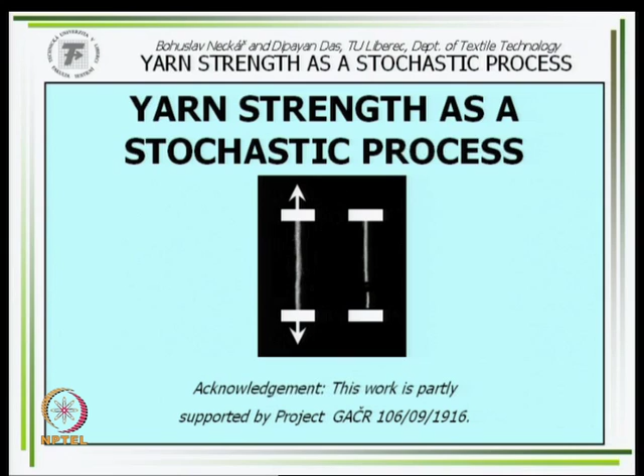Today's lecture is oriented to the yarn strength as a stochastic process. It is known from practical experiences from textile laboratories and so on that the mean value of yarn strength as well as yarn breaking strain and coefficient of variation of yarn strength are changed in relation to gauge length which we use on the breaking machine. Why? It's the theme of our today's lecture.

We will speak about the Peirce model, which is relatively old and the easiest model. In the second part of this theme, I will in short comment on our model, which is much more difficult and needs more special tools from the theory of probability, especially from stochastic processes. Well, let's start the model according to Peirce.

You know that yarn strength is a random variable. It's evident. The probability of breakage of one section of yarn of length L at a force S we can call under the symbol F(S,L). S is the strength of the yarn portion which we studied. L is the gauge length which we used, okay? So S is a random variable. L is some parameter which we know, which is the gauge length in our experiment.

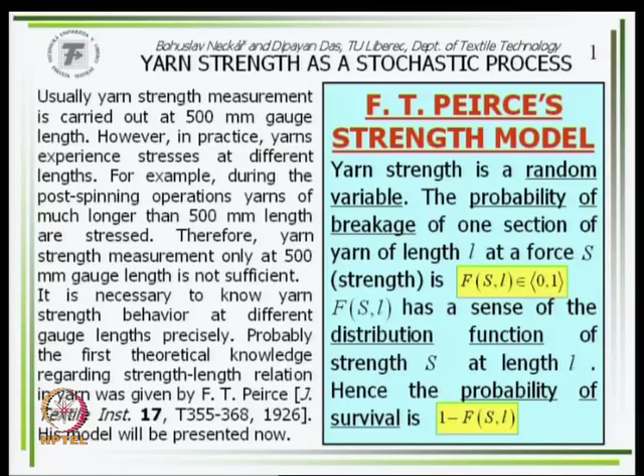So F(S,L) has a sense as a distribution function of strength S at the length L. And the probability of survival is 1 minus F(S,L). Probability of break is F(S,L), so the probability that the portion is not broken is 1 minus F(S,L).

Well, let's imagine some yarn length L between a couple of jaws. This length L, let's imagine divided into n small lengths L0. Then evidently L is n times L0. The probability of breakage of one section of length L0 is independent of the probability of breakage of any other section. This assumption is very important and it creates the basis of Peirce's model.

We assume that the strengths of short parts of the yarn, length L0, are mutually independent. You can imagine abstractly, when you cut your yarn into a set of short segments of length L0, then you mix the segments together and randomly take one beside the other and glue it together, you obtain a new yarn. But from the point of view of strength, your result will be the same because the strengths are independent. Based on this assumption, the model is created.

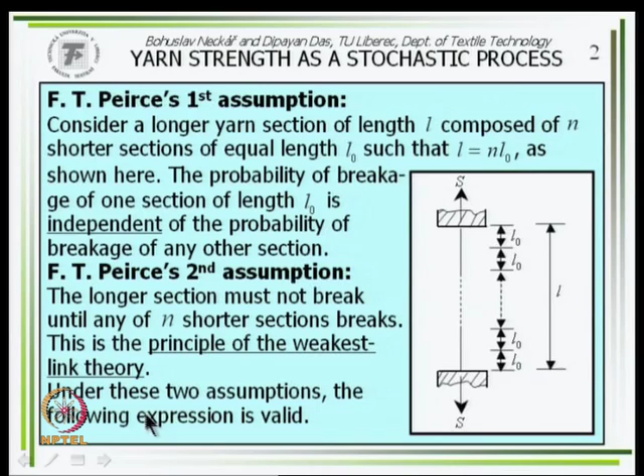Under these two assumptions, the following expression is valid. What's the sense of this equation? F(S,L) is the distribution function of strength on the yarn portion of length L, relatively long. What is 1 minus F(S,L)? It's the probability that this long length will not be broken through our force S. Is it so?

Let's imagine that this long length of the yarn is not broken. It means that the strength of the first link must be higher than our force S. What is the probability of this? 1 minus F(S,L0), the distribution function of breaking force by short length of yarn L0. How is it with the second link? Same. The links are independent in our model, so the probability that the second link will not be destroyed is also 1 minus F(S,L0).

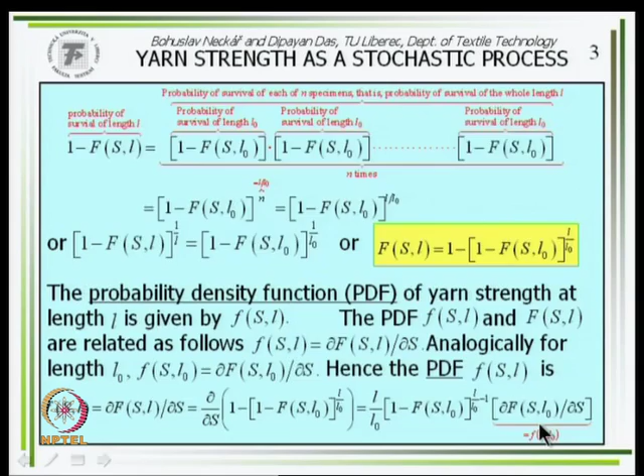Analogically for length L0, f(S,L0) is the derivative of function F(S,L0) by dS, for gauge length L0. So for the probability density function f(S,L) we make the derivative of the left as well as the right hand side, and we obtain f(S,L) as this here, where this was the PDF related to short lengths, so the probability density function of the distribution of yarn strength using long gauge length L is given by this equation.

It's good to know because in short lengths, for example 5 centimeter gauge lengths, we can do it in the laboratory. It's very difficult to make some prediction of, for example, the distribution of yarn strength using yarn lengths of 5 meter or 3 meter or 500 meter, very long. Such a constructed instrument we do not have in our laboratory. We do not have a breaking machine where it is possible to have gauge lengths of 5 meter or 500 meter.

It's sometimes very important because, for example, weft lengths in modern weaving looms can be 2-3 meters without problems. Now, 50 centimeter is the standard gauge length in the laboratory based on standards. So we can recalculate the probability density function or distribution function related to short gauge lengths to the distribution on the longer ones.

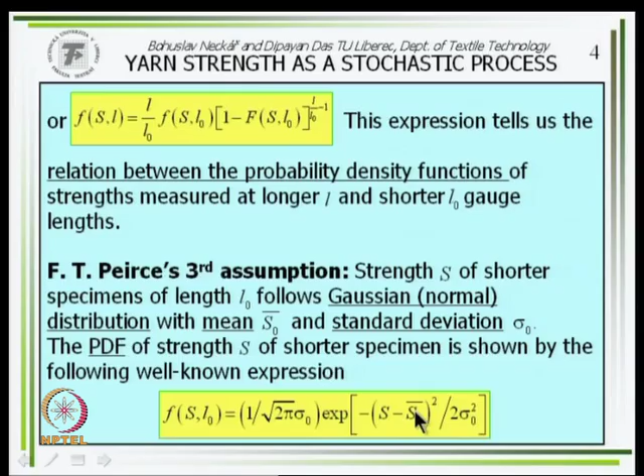You can say at the moment that on the right hand side we do not have L0. Explicitly we do not, but we have, because L0 determines sigma 0, the standard deviation, and the mean value in our short length L0. Therefore, implicitly it is there. Okay. And the distribution function F(S,L0) is an integral of this. The quantity is renamed because the integrating variable must be other than the border, so using the integral of our probability density function we obtain this here.

You know that this integral based on the normal, Gaussian distribution does not have a primitive function in an analytic form. It exists, but it is not possible to write it in an analytic form. It is the so-called Gauss-Laplace integral. Under this term you can find it in some mathematical handbooks, and there exist a lot of methods to numerically obtain the best approximation of this integral.

You also know that we often work with the so-called standardized Gaussian distribution. If our random quantity S has a Gaussian distribution, then the quantity S minus S bar 0, the mean value of our yarn strength in short lengths, divided by the corresponding standard deviation, is a quantity U having a standardized Gaussian distribution. You know it from theory of probability, I think. This quantity U has the probability density function phi(U), given by this expression, and its distribution function, capital Phi(U), is the integral of this.

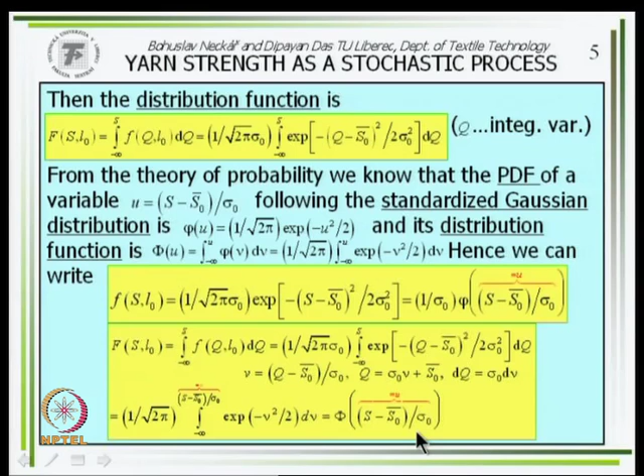So this is a distribution function of standardized Gaussian distribution. Well, and now how is it with our distribution of yarn strength on the long lengths? We derived 1 minus F(S,L) is 1 minus F(S,L0) to the power L by L0, using relations derived on the earlier slide. We obtained that it is 1 minus phi at the point (S minus S0 bar) by sigma 0, to the power L by L0, or F(S,L) is 1 minus this here.

If it is right that the distribution of strength in short lengths is given according to the Gaussian distribution, then on the long gauge length L, the distribution function is given by this expression. So we must formulate the distribution function of standardized Gaussian distribution and calculate it in the points (S minus S0 bar) by sigma 0. We need to know the mean value S0 bar and standard deviation sigma 0, which the short lengths have.

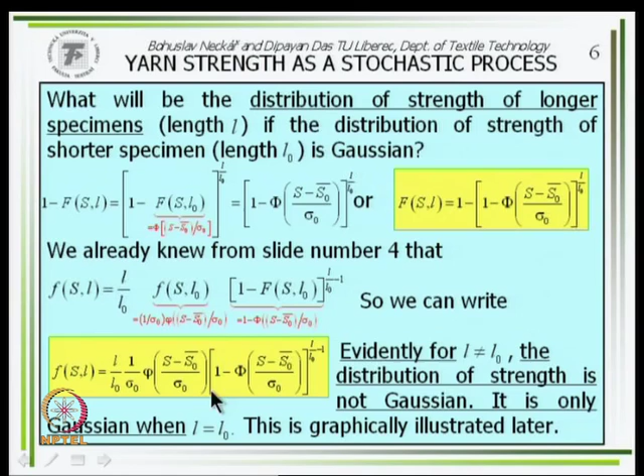You can see also here that this distribution function on another gauge length L follows this expression, so it is not a Gaussian distribution. Gaussian is in this case only the distribution on the starting short length L0. We can also derive the probability density function, which is the derivative of the distribution function, and so we obtain it in this easy way.

For better understanding: at the moment I don't know what your values of S0 bar and sigma 0 are, your mean value of strength in short gauge length and your standard deviation. Nevertheless, we want a better picture, also graphically, of how all these quantities and functions change. Therefore, let's introduce a linear transformation, which is here: U is (S minus S0 bar) by sigma 0.

When in place of S, breaking forces, you give the values from gauge length L0, then it is a standardized random quantity. But when in place of S you use random quantities from another gauge length L, then I cannot call it standardizing; it is a linear transformation. For example, I have breaking strengths from 1/2 meter, and I construct random quantities U: each strength at length 1/2 meter, minus the mean strength at gauge length 5 centimeters, divided by the standard deviation at gauge length 5 centimeters, L0. That's a linear transformation.

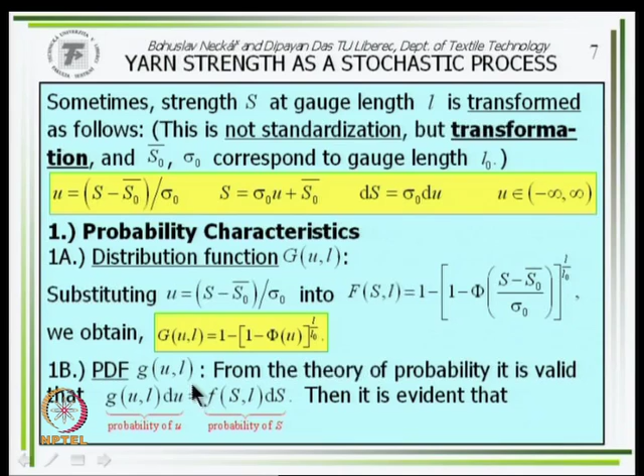It is possible without problem to rearrange our equation into a new distribution function, not the distribution function of S, breaking force, but of the linearly transformed quantity U. And I obtain the distribution function G(U,L). It's evident from this derivation, very short and easy: G(U,L) is 1 minus (1 minus phi(U)) to the power L by L0. The probability density function we obtain similarly, as the derivative of this. It is shown here, but it was F; this is in place of F.

...and this is from the S, so that we obtain the probability density function in such form, especially because of the Gaussian distribution; capital Phi is the distribution function of the standardized Gaussian distribution, and we obtain this equation for practical application in a graph. And we can show how the probability density function looks for different lengths L.

Here on the graph, the abscissa is the quantity U, the linear transformed breaking force, strength of the yarn. And on the ordinate is the probability density function g(u) for different gauge lengths L. If L is equal to L0, so that our experiment is also at our minimum gauge length L0, then we must obtain, because it was our assumption, a Gaussian distribution. In this case, it's the standardized Gaussian distribution. This thick curve here, yeah?

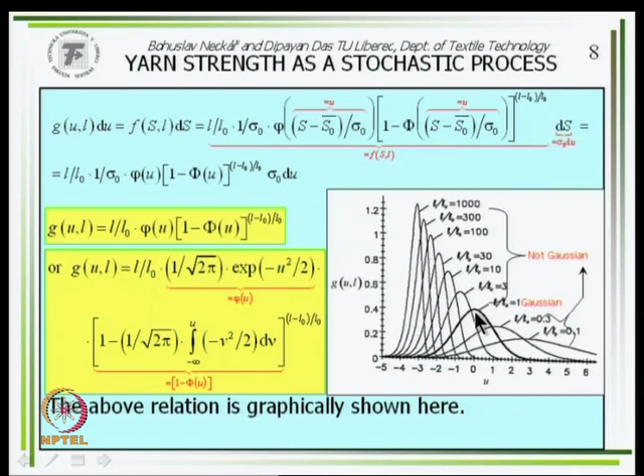You can also see the curves; this is the right Gaussian distribution. When we use a very high value of L by L0, you can see by eye that this curve is not Gaussian. For example, this curve is not fully symmetric. See it? So it's another type of distribution. Each gauge length has some other distribution. Only the gauge length L equal to L0 has our starting Gaussian distribution.

It's possible to evaluate also some statistical characteristics. U bar, which is given here, or alternatively S bar, the mean values, which we can then evaluate using this expression. We can evaluate the square of the standard deviation, or variance, of U, and using this one also the variance of S, the strength values, which is here. Then, of course, the standard deviation as the square root of the variance.

Then we can evaluate other important statistics, for example, the coefficient of variation, V_U as well as V_S. We can also obtain the skewness using this expression here, or this one, as well as the kurtosis of our probability density function.

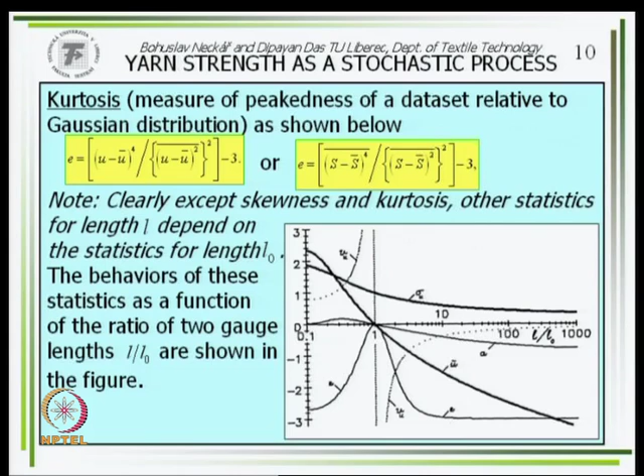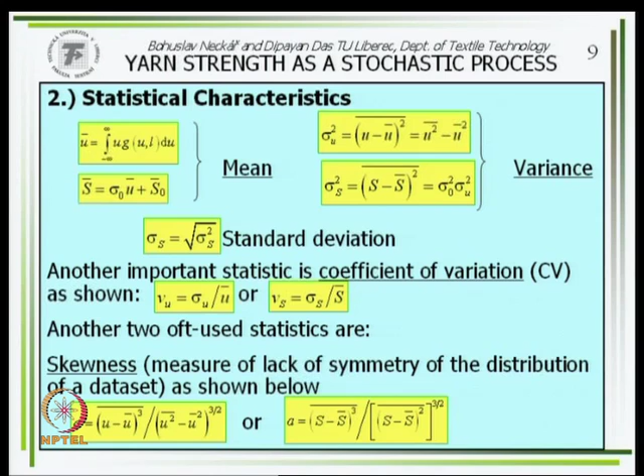He proceeded to construct some approximation equations. And when you study this material, you can see how deep his education was in the theory of probability and properties of probability density functions and so on. The resulting equations we obtained as an approximation, because we need this integral for the mean value, and for the standard deviation or variance this here. So it is very difficult. The integral is not analytical; I said it is the Laplace-Gauss integral. So it was very difficult, but he found a relatively good approximation.

In my book, as well as in older books, for example Żurek has it in his Structure of the Yarn, the Polish book, the difference between this approximation and the original results is compared, and I can say it is not practically too important. So we can very well use the following equations.

He said that sigma u, which is sigma s by sigma 0, where sigma s is the standard deviation of the strength at our long length L, and sigma 0 is the standard deviation of yarn strength at gauge length L0, and that ratio is L by L0 to the power minus 1/5.

The second equation is that u bar, which is (S bar minus S bar 0) — the mean value of yarn strength on the gauge length L minus the mean value of yarn strength on gauge length L0 — divided by sigma 0, the standard deviation of yarn strength on the short length L0, is 4.2 times ((L by L0) to the power of minus 1 by 5, minus 1).

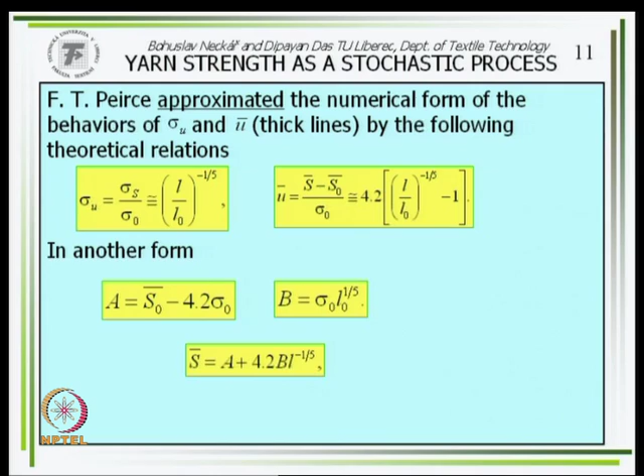Then I can calculate the parameter A, as well as the parameter B, where in the place of L0 is now 0.05 meter, our short length. Are you able to calculate both? And how is the mean strength by 3 meter long gauge length? You have this equation here. And so on. So through this way it is relatively easily possible to obtain the mean value and standard deviation and so on for the gauge length which you don't measure, based on the results which you measured.

This graph is one of the graphs from a work of Dr. Dipayan Das from the years in which he was at the university. The points here are experimental points. It's an example from some yarn, combed yarn 7.4 tex from cotton. The yellow points are experimental points, based on how we measured in our method. We used 5 centimeter gauge length as the shortest. 5 centimeter was for us the shortest L0 gauge length. Why we use 5 centimeter?

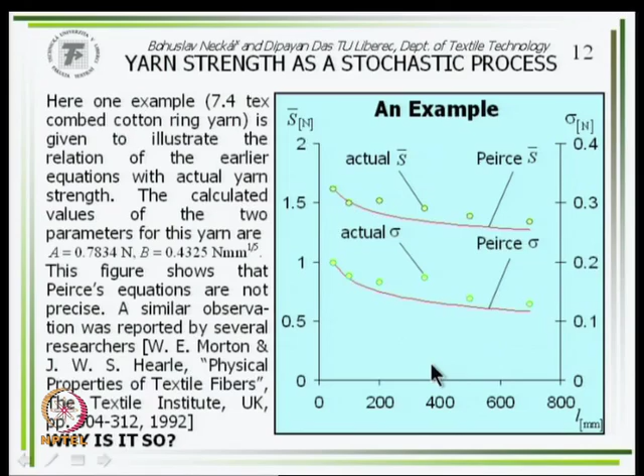Well, you can see that principally this theoretical concept corresponds to the reality. It corresponds to the reality. Nevertheless, at some distances you can see the red curves are a little under our experimental points, isn't it? Yeah, it's typical for the situation. Why? I want to say in our next lecture.

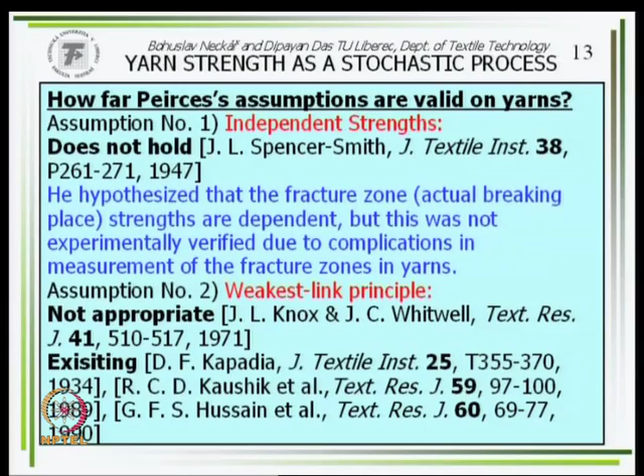So, for the moment, thank you for your attention, and in the next lecture we will continue with notes on the possible modification of this Peirce concept.